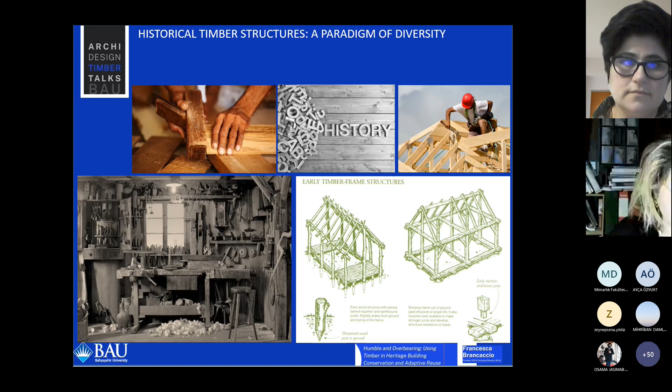Of course, it is a methodological approach that we have in restoration, which needs to understand what the problem is. As soon as we have some timber structure, the first thing to do is to study the literature on the subject, to study all the documents and evidence that we can have, and immediately also to start to understand the elements that we have. Then to make a survey, to try to register and record all the data that we have in a complete database, make the analysis of all these technologies, and also the analysis of the environment that we have.

Of course, it's very important to have information such as temperature or humidity or things like this. And then we have to understand what to do, which are the hypotheses that we can understand of the transformation of the typologies, of the solution of the dimensions, how to integrate it, and also to collect some similar case studies and then make some comparison and implementation.

What is also important, of course, is to understand and have all the information on timber, which timber is used, the kind of typology of degradation we have, which are the attacks, biological or non-biological, and also start to make a thorough survey of every element.

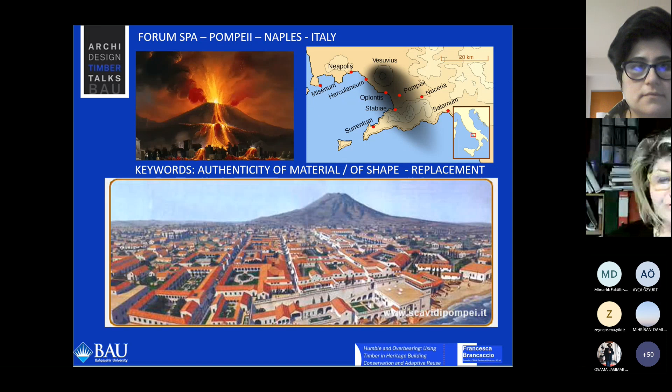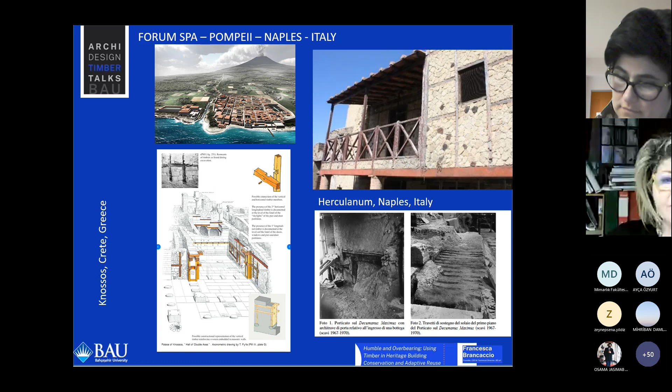This means that in restoration activities, as they started to bring to light the archaeological ruins of the two cities, since we find wood in Herculaneum, we can in some way restore it. Of course we cannot find the original wood, but the burnt wood, with some chemical addition of materials like paraffin or resins, can conserve the shape and also the material, which was the ancient wood. This means we can understand how the ancient structures were made, and even recuperate and consolidate the material to have as much of the old material as we can.

Here are some examples of wood which was used in structures, for doors, for boats, even for furniture, across different centuries. The techniques were studied at the end of the 19th century, and still today, when they find some elements, they are able to conserve the shape and even what is still kept of the material.

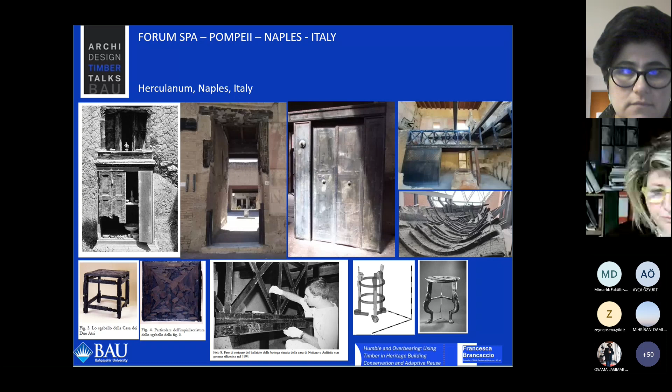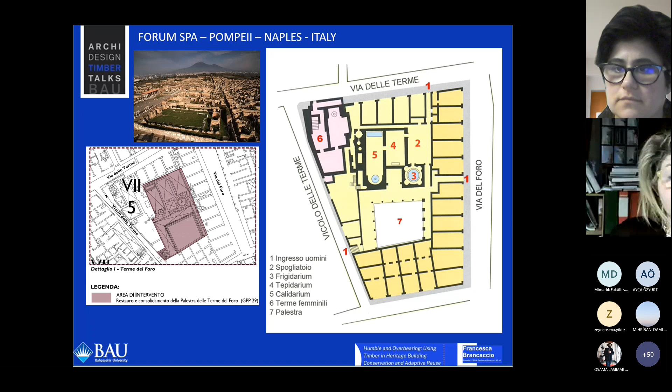Of course, in some cases, they need reintegration with modern wood or with resins. A different case is that of Pompeii. Pompeii was covered by a thicker layer of volcanic material, which also burned everything, so the timber was not conserved at all. We don't have any trace of timber, but we can understand where some timber structures were.

For example, in this case, the spa of Pompeii, in the center of the town, they could understand these were the ruins as soon as they were discovered. It is a portico which lost completely all the timber elements that were supposed to be here. Then there was a roof, but we don't have any trace of this roof. The idea of the restoration at the beginning of the 20th century was anyway to reconstruct the missing elements, and they decided to do it.

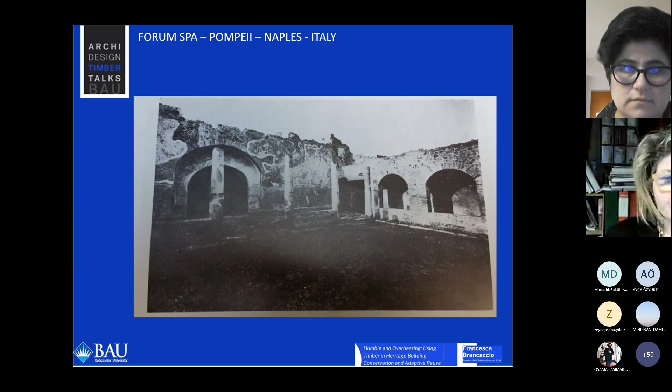This is the reconstruction with new material. The new material that was chosen was concrete. You may remember that in the Charter of Athens in 1931, the reconstruction of missing materials was welcomed, and they even suggested using new materials. Concrete was one of the materials suggested in order to be distinguished from the old material that was missing.

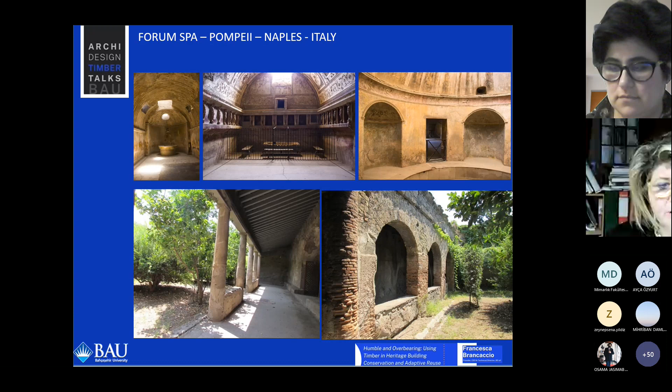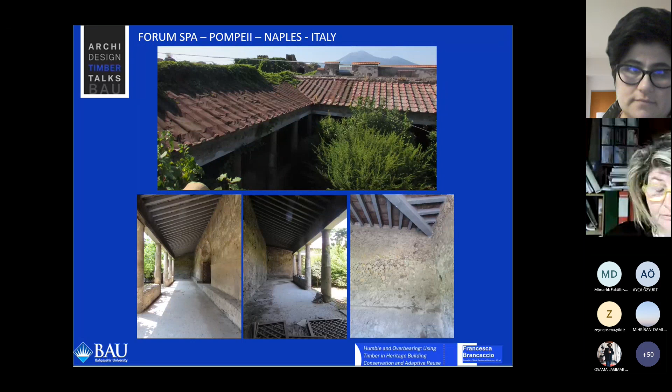In 1950, the archaeologists decided to reconstruct, to repropose the idea of this porch, a triporticus, with concrete beams. Of course, today these concrete beams start to give very big problems to the ancient walls, because of degradation, because of the iron that was inside that was oxidated and was also damaging the walls. Then the Archaeological Park of Pompeii wanted to get rid of this old structure and demolish everything and propose a new wood structure.

This is maybe a methodologically very extreme situation, because of course we know that once there was a wooden roof, and we know it because they discovered the old traces of the beams. But nobody has ever had the old image of this porch, even if we know about timber structures in Pompeii only from the frescoes that are in Pompeii. Then the idea here is to go back to history through an invention, a structure that of course existed, but that nowadays exists once again because we are changing the material from a modern material to a more traditional material.

The idea is to have a material which can give the idea of being more traditional, but also which has a better compatibility with the walls, which means that once the wood becomes older and has some decays, the consequences that these decays can have on the old walls will be less with less impact than the concrete, of course.

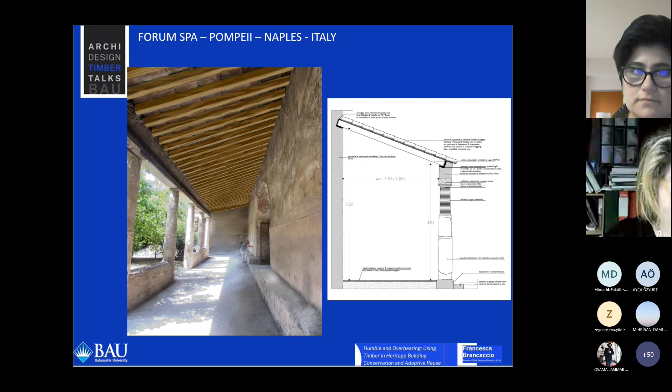In terms of identity, in terms of authenticity, this might be a kind of intervention that could, in some ways, make people who are not educated understand - people who cannot understand that old wood does not exist today in Pompeii. Then tourists could think that it is an old material, and this is maybe the philosophical and methodological question that we have to understand, because we know in restoration that it is very important to be able to distinguish the old from the new. In this case, that could be a problem, which means it is very important to explain that it is not an old material, but a new material used because of compatibility and also for a question of the traditional imaging of the space.

Another subject I would like to present, also in the south of Italy, or maybe in the middle of Italy - we are among Naples and Rome. Naples is in the south of Italy and Rome is the capital, in the middle of the country. It is a little town called Ceprano, not far from Frosinone. It was a Roman city which was destroyed during the Roman period and rebuilt in medieval age with the stones and remains of the old Roman city. Which means that today we have a medieval city with very narrow houses.

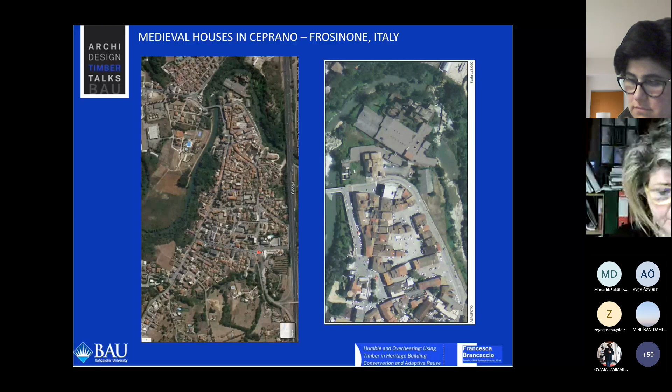Very poor houses also, because it was not a very rich town, but it had the traditional medieval Italian house, which was a house that had a shop giving onto the street, and then all the other rooms, one above the other, on the different floors upstairs. This town was also destroyed during the Second World War because it was bombed. Then you can see that there are many spaces which are empty because the traditional urban pattern was destroyed, and there are many houses that no longer exist.

The object of the work in this place was to work on some of the medieval houses which belong to the municipality of Ceprano, and the municipality wants these houses to become houses for poor people, for people who cannot afford high rent, and that can rent it at very low prices. The first idea of the municipality - and this can also show how the philosophy of restoration and the idea of what is valuable to conserve in Italy is changing - because only in 2016 they wanted to destroy these old houses and build new houses in concrete, and the project was already made, and the enterprise was chosen in order to start this work site. And I was appointed as director of work, as supervisor of work, and then I was also called to destroy these old medieval houses.

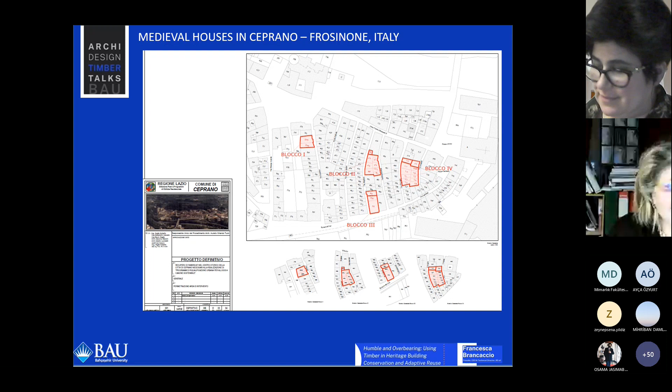Of course, many of them were abandoned for years and also destroyed by bombs. It was not easy to convince the municipality to do another kind of work, but the Ministry of Culture obliged them to do it, and this is what is happening now. We are still working on this. It's a work that is not yet finished.

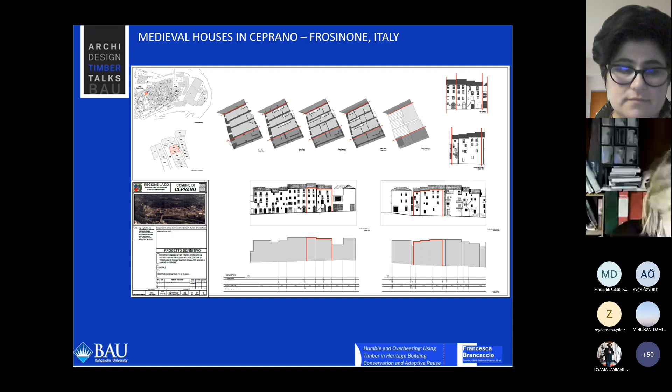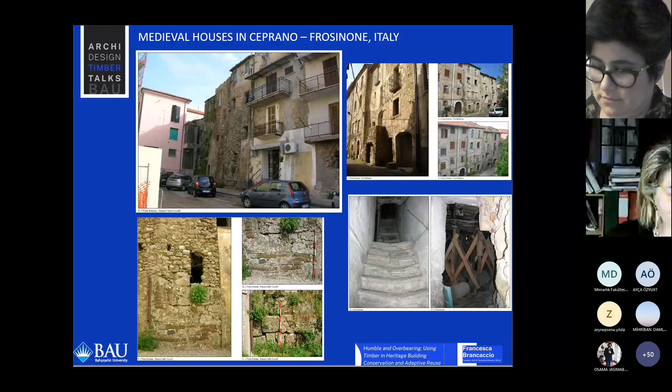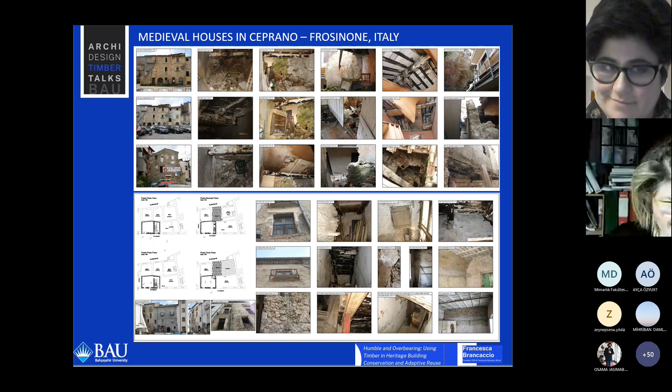We were obliged to study every house from the beginning, with all the research and survey, stone by stone, element by element, timber by timber, trying to understand all the elements we could save and all the others we were obliged to destroy, because they were no longer ensuring security, or we were not able to restore them, or because they were not valuable elements but just rubbish inside the buildings. Some views of the houses show how traditional they are.

The walls are made of these Roman stones, and then we have all the floors which are in timber, and also the roofs which are in timber covered with tiles.

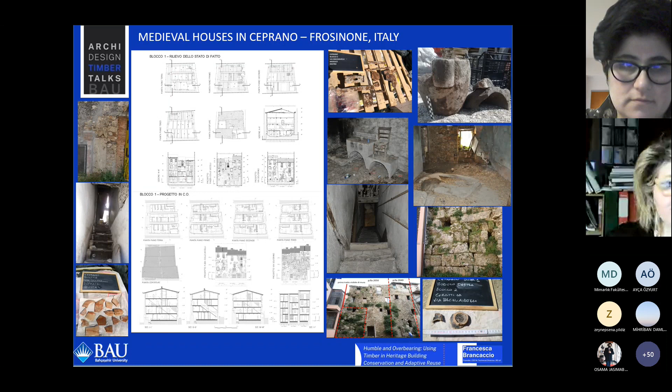All the elements have been studied and investigated with even an archaeological approach. Even if all the elements are very poor, every iron we found, every little element of popular, traditional culture was saved and studied. After all the survey, the intervention changed case by case, even if some elements are almost the same.

I mean, the technology is always the same. What is changing is that in some cases we could save some elements, and in others we could not.

In some cases we could, for example, we had investigation of walls, and the walls were better made than in other cases. Then we could, for example, rely on walls supporting the structures.

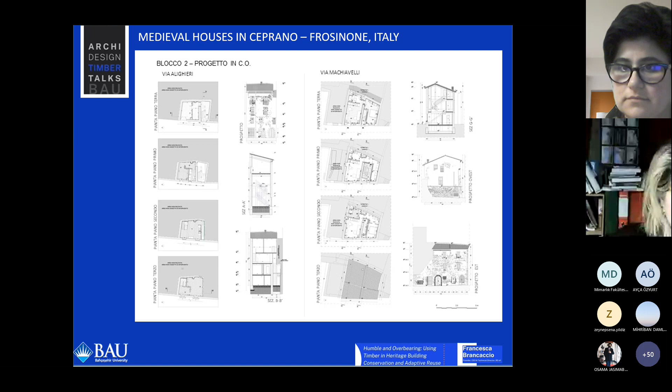In other cases, we were obliged to make an internal structure which avoided putting weight and effort on the walls, because the walls were not able to support the new weights that we need.

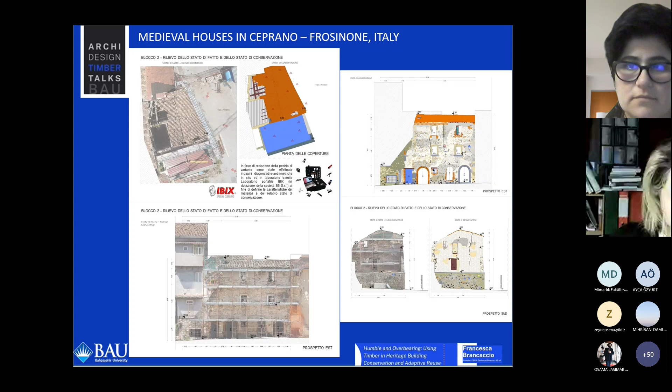Once again, some studies that were made. You see every element, every stone, every degradation was also investigated.

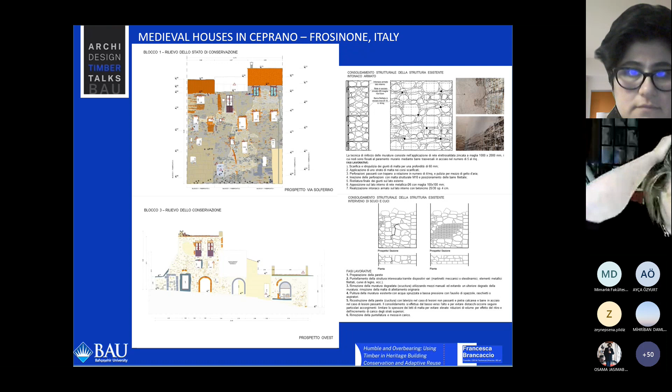Then we started to think about how to consolidate the walls, because of course we wanted to see them, since they are made of Roman stones, and it's interesting to see these walls. So we needed to find a way of consolidating without having plasters outside.

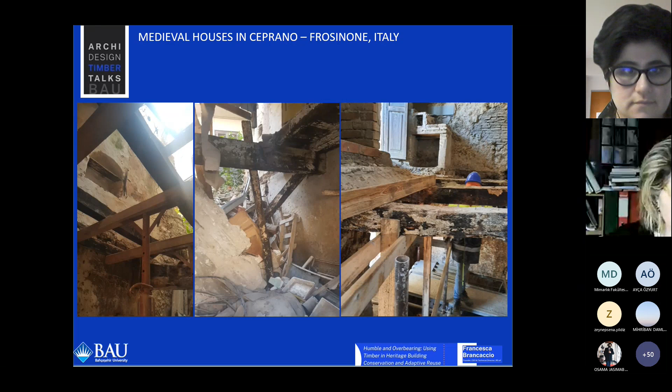This is one of the houses during our work of survey. You can see the degradation was complete because of the bombs, because of the roofs that had collapsed, and then the rain entered and destroyed everything, because of years and years of lack of maintenance and abandonment of everything.

Then we started to consolidate the walls and to think about, in some cases, an internal structure that could avoid any interference with the walls, doing it with iron and with this X-LAM wood, which was a very clever method to give the old idea of the floors that we used to have with traditional material, which is wood, but with modern technologies.

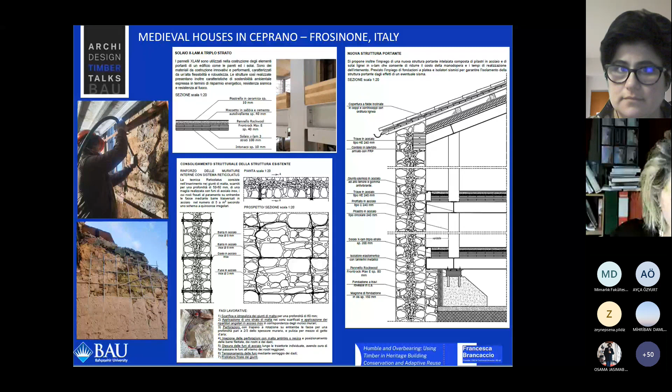Here are some examples. In other cases, we were able to keep even the old material, the old beams, but of course the old beams did not give any assurance of being able to keep the weight that we need. Then we needed to reinforce them by adding some modern elements. In this case, we put iron elements.

And we had then, a sort of compromising solution. I wanted to keep as much old material as I could, but I also needed to have floors ensuring the use that is forecasted, which is residential use. This is why we need to add some reinforcements.

In this case, we can distinguish it. We had the old wall, the old timber, and the iron elements supporting the timber. We are keeping all the old elements that we can, and changing all the elements that we cannot reuse. You can see even here the beams, old beams together with modern beams.

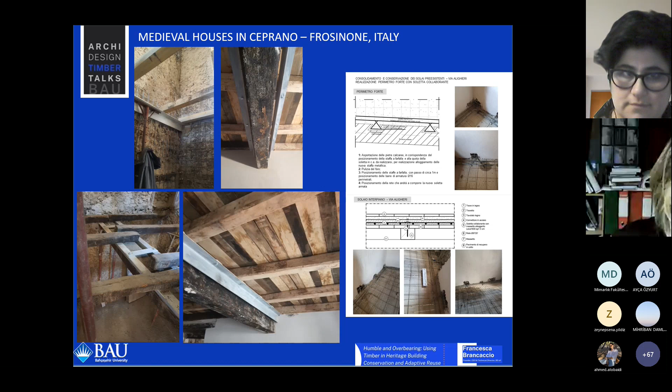All the system was also reinforced by some concrete elements all around the box of the walls. Then there were what we call 'code di rondine,' which are like little iron elements entering the walls, and with some concrete injection, they create a way of belting the building at the level of the floors.

For the roof, the same thing. We were able to keep all the beams of the roof, and also to improve the thermal resistance of the building by adding elements that satisfy the energy regulations we have in Italy. And we were able to reuse the old tiles together with modern tiles.

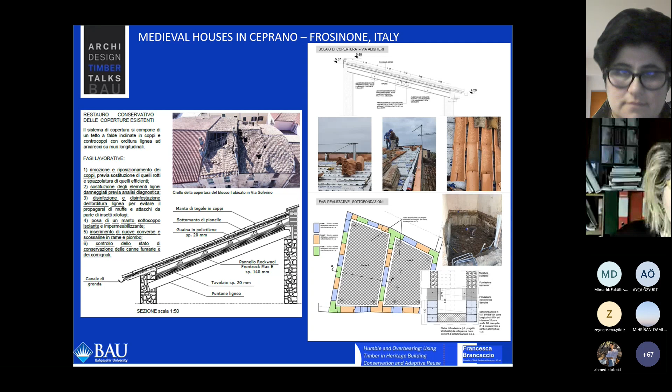We recuperated the old tiles and put them on top, adding new ones where we didn't have enough old tiles to cover everything. So we have an old image collaborating with new material together. Here is the roof — you see the wooden elements we recuperated from the old structure, together with new ones.

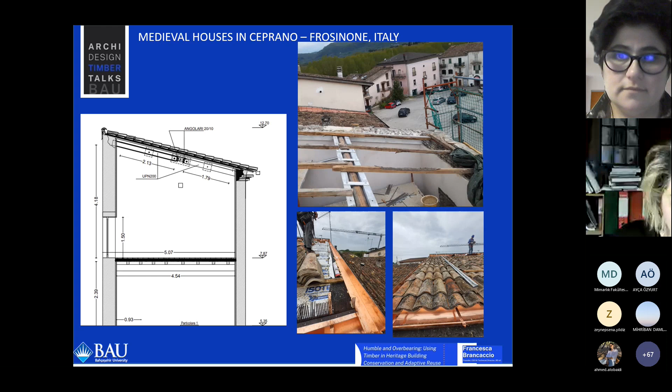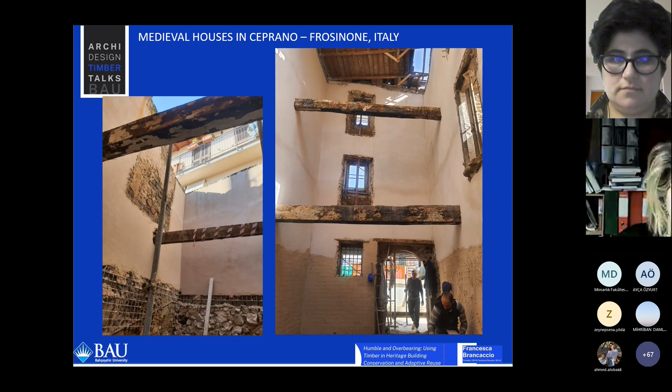Once again, during the work at the interior, we did not have any floor at all, but we kept all the elements that we could, and integrated them into the new structure.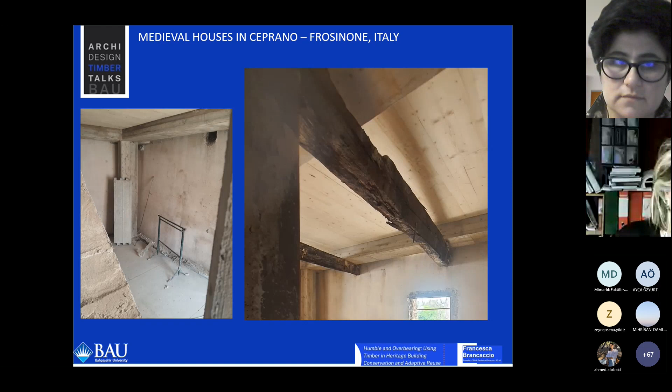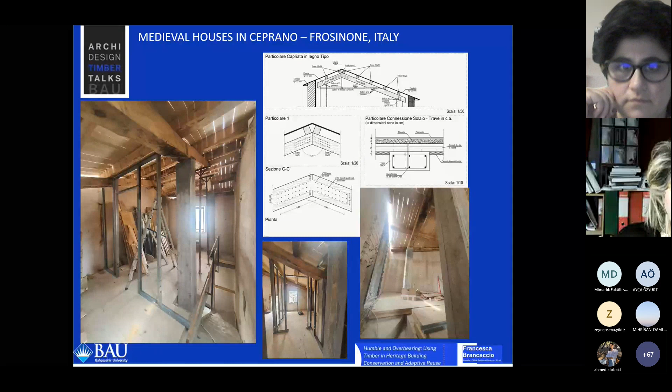This is another case. Here, we were obliged to make a new concrete structure inside the old box, always with X-lam between the concrete beams, while at the same time keeping the old beams. They don't have any structural function in this case, but they give a traditional image and are kept in the same place where they were. You see the concrete elements going up, and they are also supporting the roof, because even the roof is not linked to the ancient wall, but only to the concrete structure.

The third case is in another little house. Here we could use the walls to keep the floors, but we decided not to put wooden beams, instead using iron beams, always with X-lam among the beams, while always keeping the old timber beams.

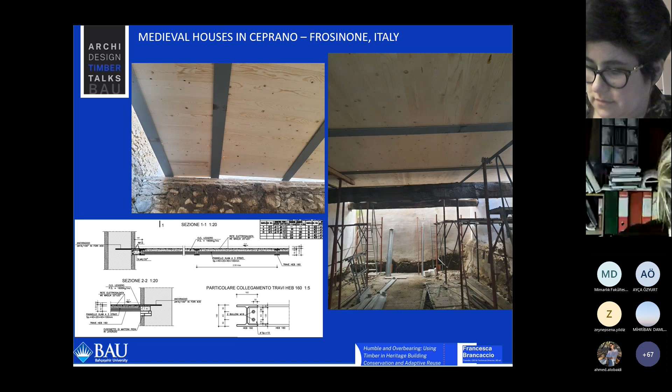The effect you can reach is very interesting, because you have traditional walls, and when you change things — since here we did not have any ancient floor anymore, they had all collapsed — you get a modern image together with traditional and modern materials linked together.

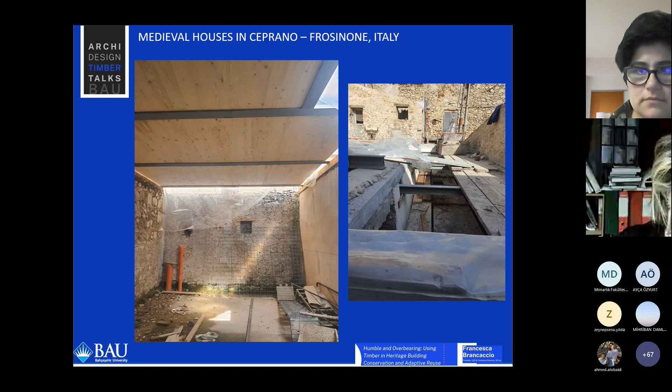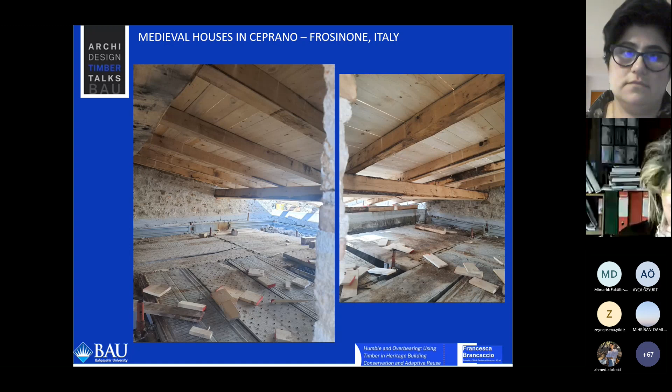For the roof, we decided to keep the traditional technology, but we changed all the beams, because we had only one or two still in place, and they were attacked by fungal decay and insects, so it was not possible to save them anymore. We measured them and made new beams with exactly the same shape, made of the same wood, using the same technology.

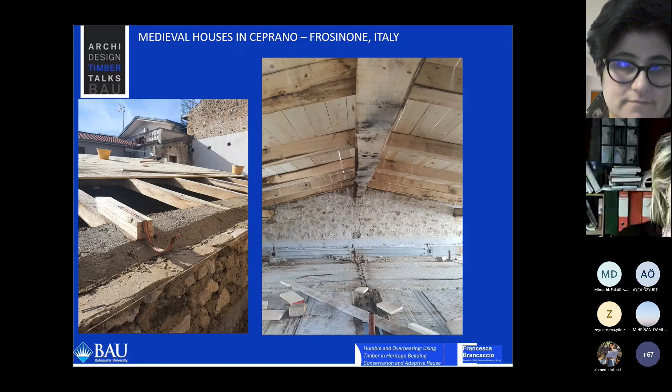Another case — we are passing from very poor houses to a very rich house, which was a palace for an aristocratic family of the 18th century in the center of Naples. The historical center of the city of Naples is a UNESCO World Heritage site with a protection zone.

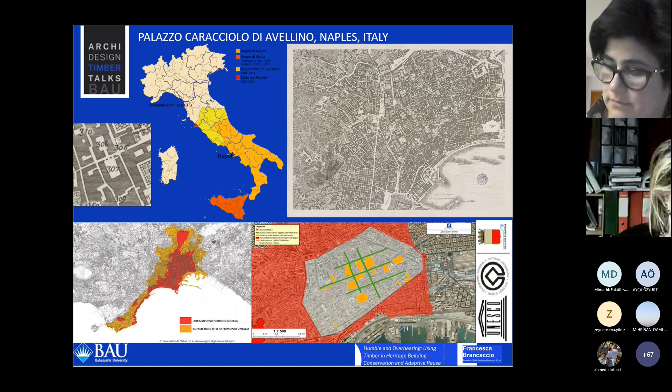In this zone, which was first the old Greek and then Roman city, an important Neapolitan family, the Caracciolo di Avellino family, built a very big building, which was supposed to be a sort of academy, a place where philosophers, artists, and important intellectuals of the city would stay, discuss, and hold conferences and lectures.

Over the centuries, when the family sold the palace, it was divided into different properties, and they even lost the memory of beautiful frescoes described in literature. It was used as a school and completely covered with white paint, so all the layers of the frescoes were completely covered. We cannot see anything anymore.

One of the most important questions while restoring this heritage building was the earthquake, because Naples is a seismic zone. We had a very important earthquake in 1980 which destroyed and damaged lots of buildings in the city. The history of our region is an history of earthquakes.

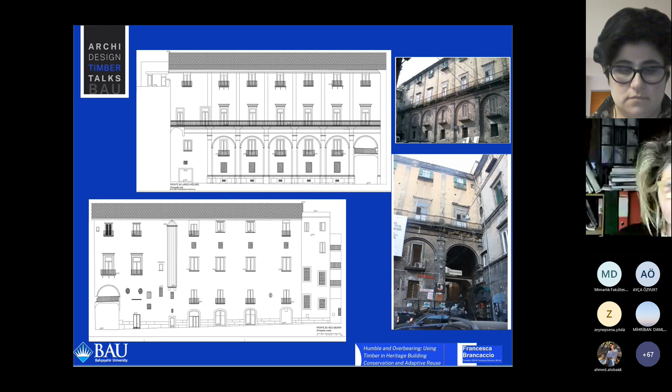Once again, the investigations, the knowledge of the building is the most important thing to do, because when you study and understand the geometry, the materials, the decays and why you find them, you can fight and repair them, but also prevent future decays. You can also understand what to do and how to intervene, which methodology you can apply in this case.

What we decided to do here, as our philosophy teaches us, is to do as little as possible. This is what we strongly believe: for us restoration is to recognize the values, to try to conserve every element you can identify as a value of the building, and to intervene as little as you can. We call it the minimum intervention. Once you can do less, you are really succeeding in your work.

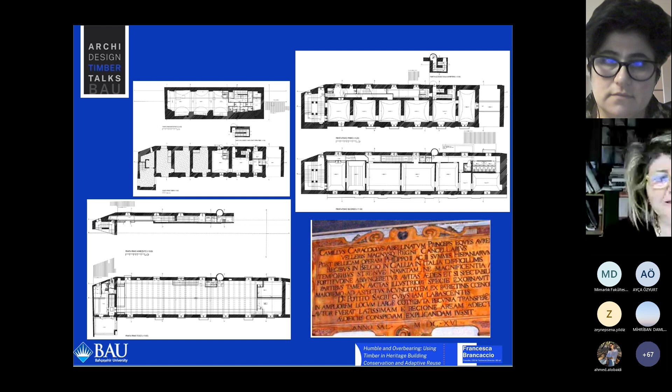In this case, the survey showed that we had a building built in two different phases. The lower part was made in stones, Neapolitan tufo stone, which is a volcanic stone, and the structure was wall with vaults - you can see in the section the part in black, which is the profile of the vaults. The two upper floors had a floor and roof which were in timber.

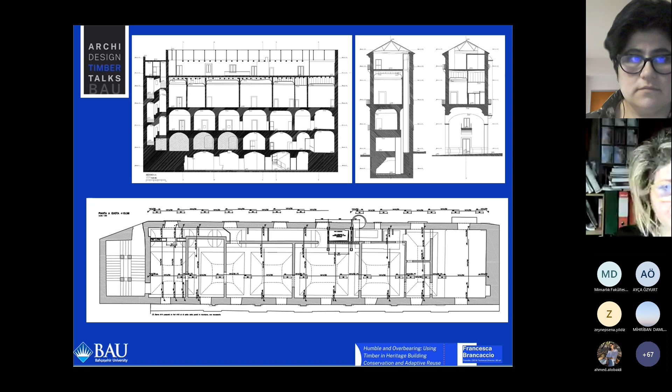Then the first thing to do was to consolidate the building, to make some verification in order to improve the strength and resistance to earthquakes. These were some elements that we were able to discover during the restoration activities.

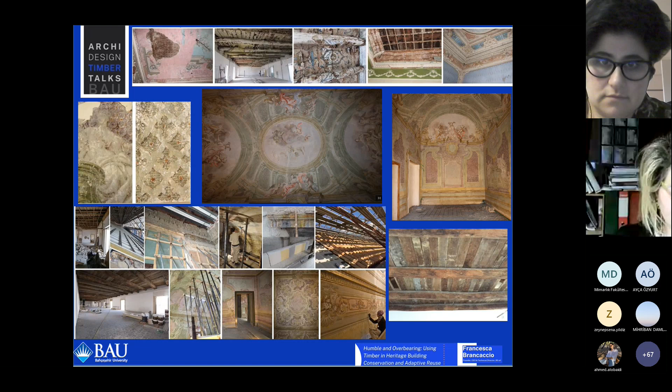For instance, all the frescoes in all the rooms at the first and second floor that we were obliged to conserve. We could not intervene on walls with consolidation activities because we had very beautiful plasters with very beautiful frescoes, and the intervention had to understand this kind of problem and respect all the values of the building.

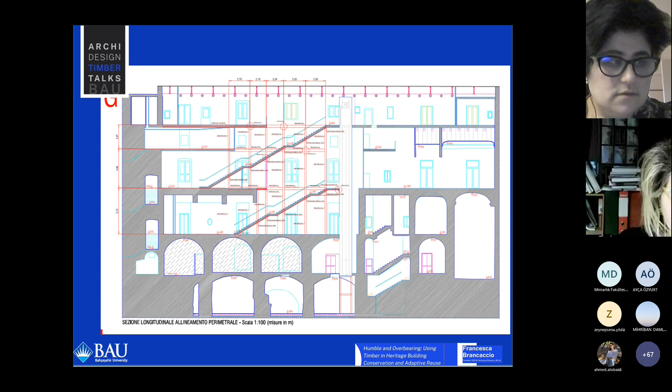What we wanted to keep was, of course, the two floors in wood, the upper floors, while also achieving better resistance to earthquake. So what we decided to do was put some chains, iron chains, which could improve the resistance of the building.

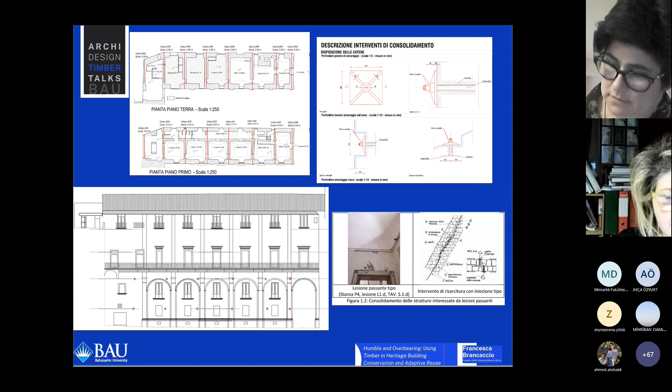There were very little elements inserted at the lower floors in order to improve resistance. In some cases, when we had important degradation of the wall, some important lesions, we were able to make consolidation interventions. The same thing also for the vaults - where necessary, we made some intervention on the vaults. What about the timber?

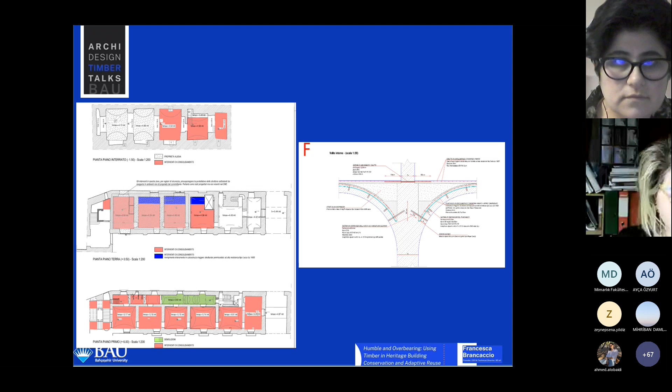The problem was that in some cases we had very important frescoes, and of course we could not take them away. In other cases we were able to analyze all the timber beams and understand that we could keep them. Then the only work done was to reinforce the ends of the beams where they are introduced into the wall, and also to clean them as little as possible in order to prevent any insect or further degradation.

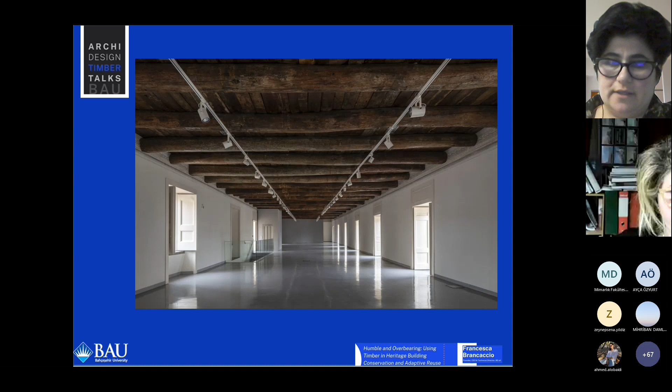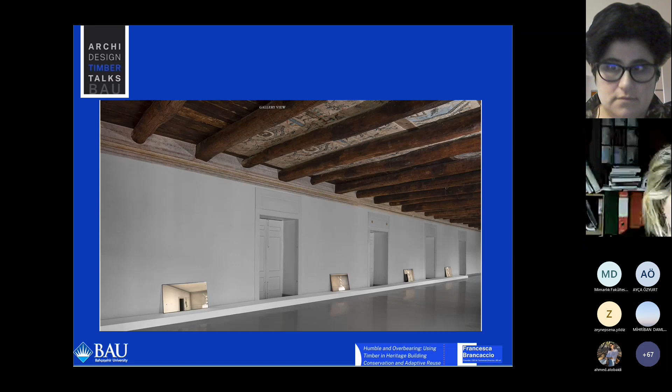We were also able to keep some little traces of painted paper which was traditionally put on the beams. And when we found them, we were able to restore them and find them once again.

Here you have the vaulted spaces at the ground floor and the first floor. We rediscovered all the frescoes which were completely hidden, and we were also able to restore all the windows and other wooden elements, the doors, that were original. Unfortunately we could not find the original color because they were all repainted - I would have liked to find the original layer of the painter, but it was not possible. But we found the original color, then we repainted it in the original color.

When the beams were not strong enough to support the charge that the new museum should have supported - because at the upper floor they wanted to make a sort of restaurant, cafeteria, and auditorium, which had to stand very big weights - we wanted to keep the old beams in order to make people understand the old technologies, and also because the beams were not damaged and we could keep them, but they were not enough to take the weight that the new building was asked to support.

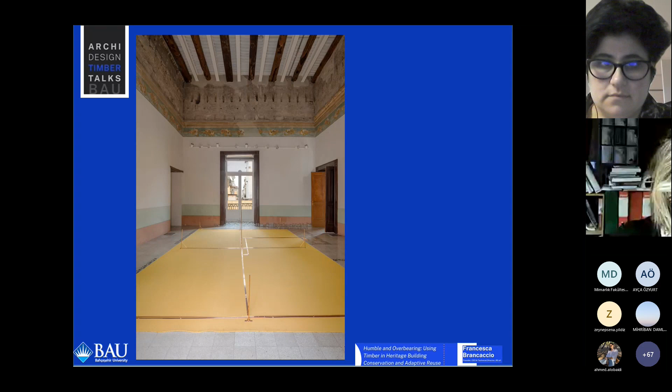Of course, what you are missing are the wooden elements among the beams, which is in the tradition of the Neapolitan floor. But we could not keep everything - there were elements that we were obliged to eliminate because they were not supporting anymore. They were all completely destroyed, and then we were really obliged to destroy them.

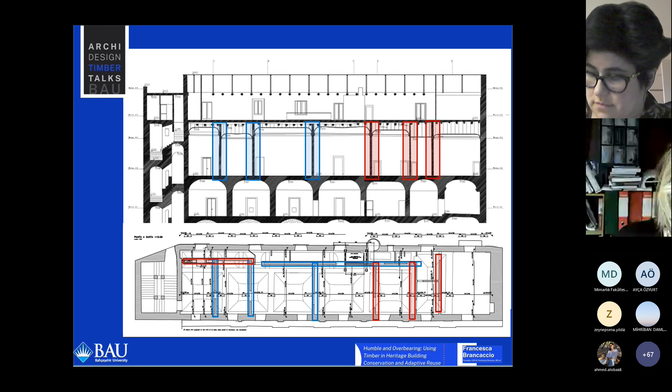What about earthquakes? Once again, we discovered in these elements, the red one and the blue one, that they were built after the 19th century, in the system of opus craticium, the system of Casa Baraccata. They were hiding wooden elements together with masonry.

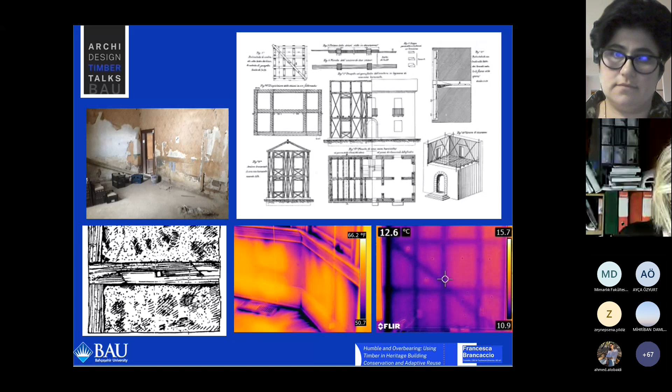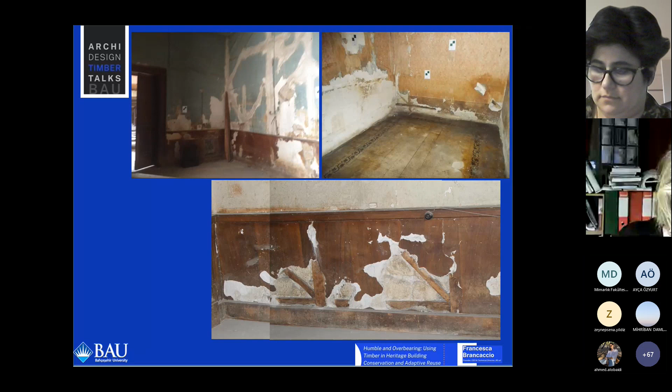And what to do in this case? Of course when we had frescoes, we could not do anything because we could not take the plaster away in order to reinforce the wooden elements. We were able to investigate them with thermography, and in the very limited places where we did not have frescoes, we could make some kind of reinforcement of these elements, once again by using iron elements that were hidden then in the new plaster.

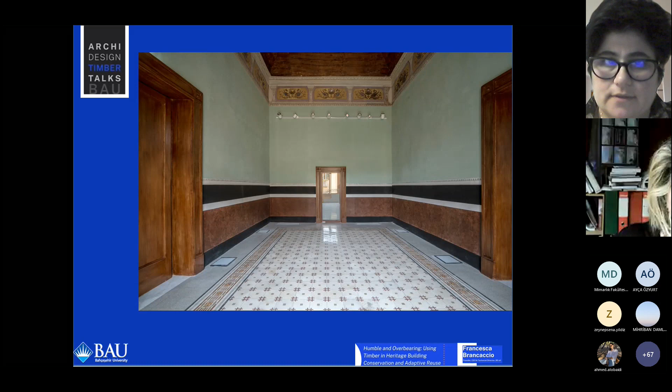And this is the effect that you have today, which are new plasters, new painting where necessary, and the respect of what was already existing. Here you can see there is a decoration from the beginning of the 19th century, and also an ancient wall, and all the doors - everything was kept, but the plaster where we were hiding the modern structure, and once again one of the effects of the restoration today.

Then I don't know how much time I still have. Maybe a few minutes. Just to give some general rules of the intervention.

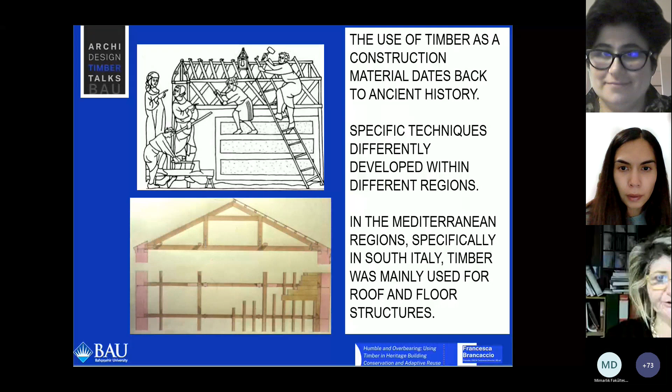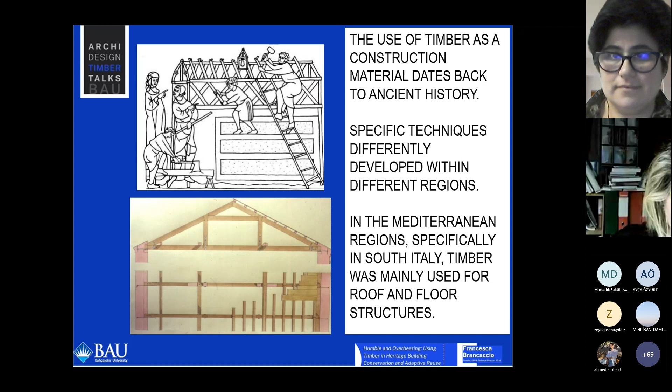The use of timber as a construction material dates back to ancient history, and we have different technologies. We have to understand case by case which is the technology, we have to study what the technologies are. We can consider historical timber structure as a paradigm of diversity. Diversity means that each element, each part of an element, is a mark of heritage authenticity. It means the structure can change, can be various, and can have different levels, and that there is variation in the typological form, which means we have a special task: we have to recognize, capture, and interpret all the differences.

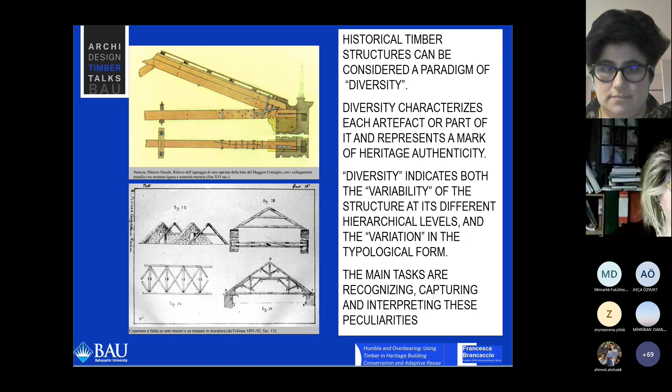We have to understand that, yes, timber can be a very strong material, but it also has a lot of sensibility to external conditions. When there is a lack of maintenance, a lack of keeping, it is very difficult to preserve it. What is important is the change of the way of thinking.

In Italy, nowadays we are having a new way of thinking, which is not to destroy timber. Only 20 or 30 years ago, the easiest thing to do was to destroy a timber structure and propose a steel structure, a concrete structure, or glulam in place of timber.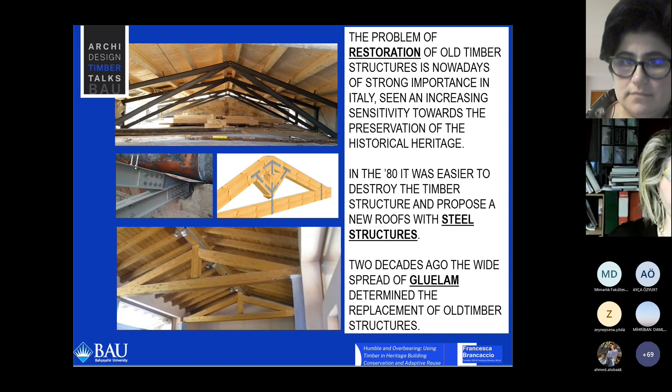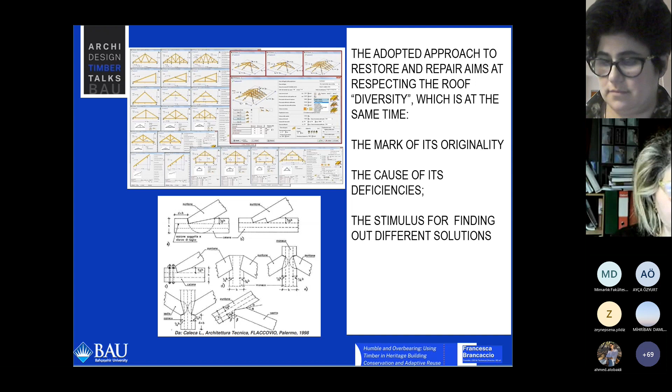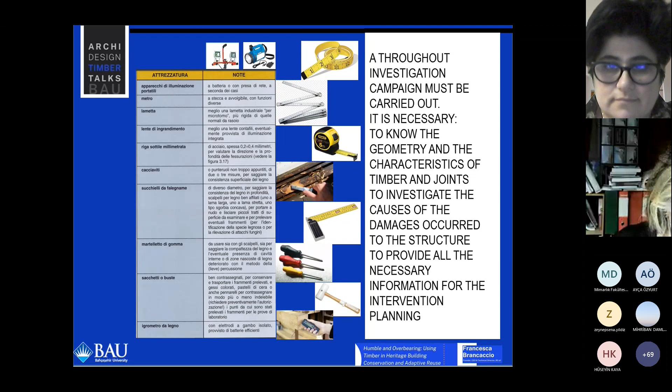Today the methodology is to keep as much as you can, to study it, to understand which can be the solution in order to intervene. You can do this through a very scientific investigation campaign, because you need to know the geometry, understand the joints, understand the causes of the damages, and make an intervention plan.

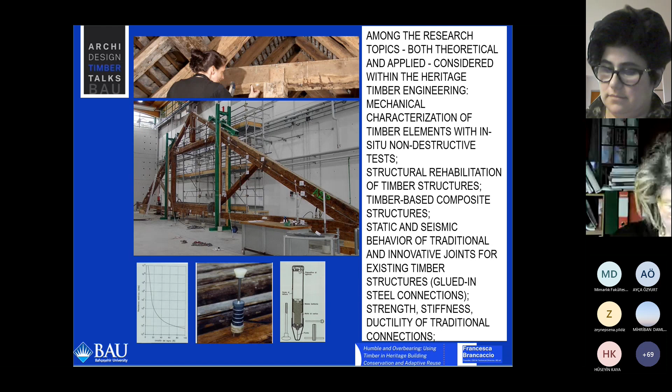You need to understand the structural behavior in the organism, in the building itself, and you have to apply a methodology which relies on reversibility, minimal intervention, the idea of saving as much as possible, and the idea of distinguishing the new from the old.

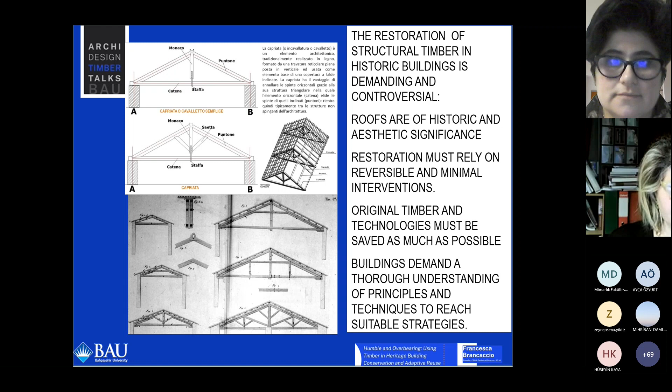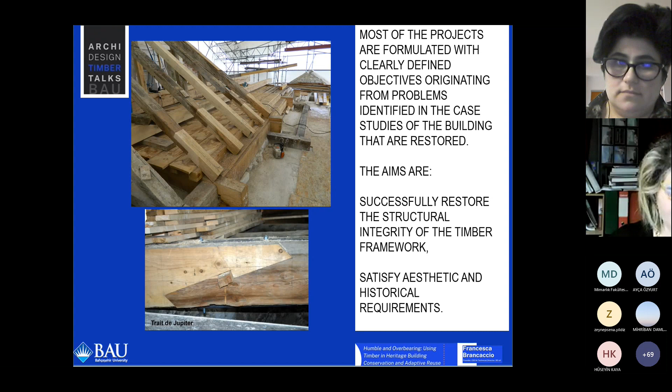Every case needs a suitable strategy. You cannot have a one-case solution, but every project needs to understand which are the problems and how to intervene, how to re-give, if you can, the integrity of the timber framework. How can you satisfy aesthetic and historical requirements together?

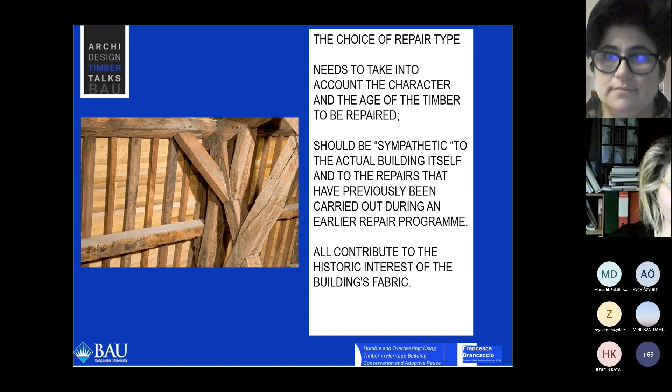You can repair, of course. You have to take into account the character and the age of the timber you are repairing. You have to choose new material which is sympathetic to the actual building itself, and which also sticks to the old material, contributing to the history and historical interest of the building's fabric.

You need to make a careful investigation, a specification, and you need workers who are able to work on wood. The execution is very important. It is a very specific profession, and you need professionals for this. There is no restoration or conservation project that can be successful unless you have good workers specialized in wood, who understand the wood and how to intervene, and the technologies specific to this kind of material.

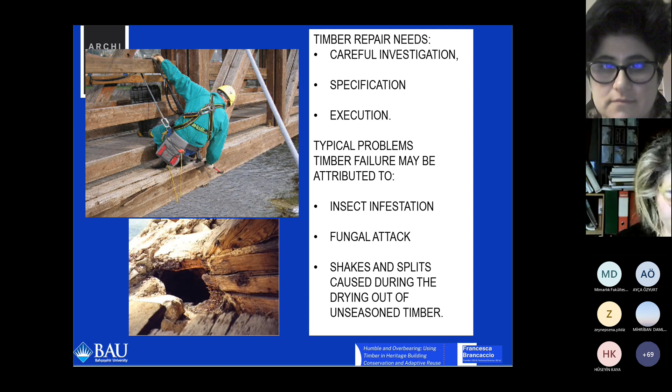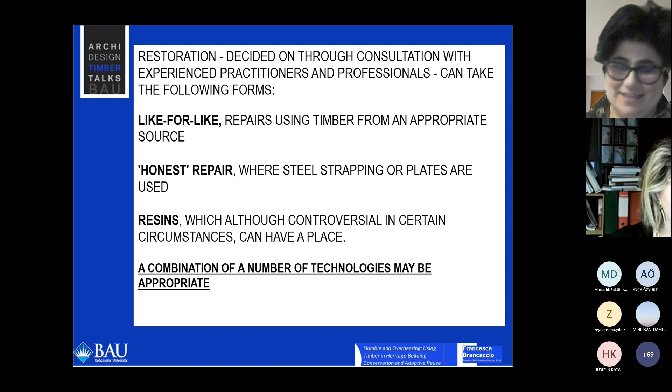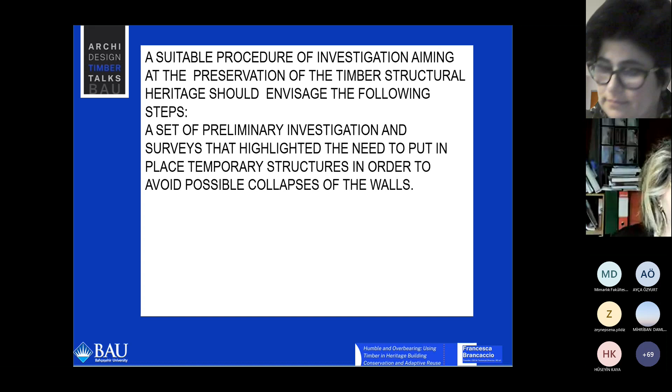You can make like-for-like repairs, but you must do an honest repair. An honest repair means you always choose the suitable procedure of investigation and preservation, which sometimes needs preliminary temporary structures in order to protect and reach the timber. In some cases you cannot reach it without scaffolding, and sometimes you need time to do this. It's not always something you can plan during design, but something you discover while doing the work.

The diagnosis you have to do is a very scientific diagnosis. You need professionals who are experts in this material, because you need to identify the wooden species, the moisture content, and understand the classes of biological attack risk. You have to study the geometry and morphology of every element, and the elements of decay and damage. This is not something a general technician can do, but requires someone who is really specialized in this kind of understanding.

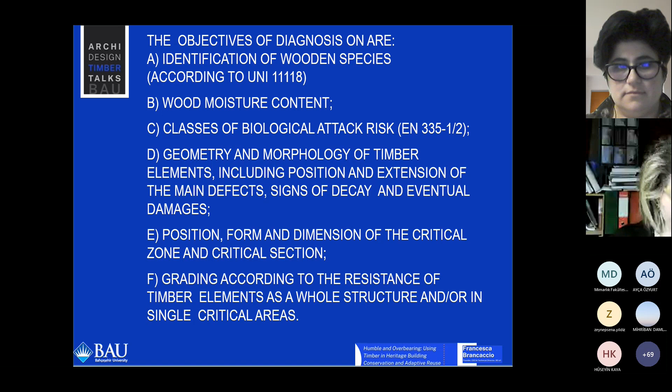You also try to understand which are the critical areas, and the grading according to the resistance of timber elements in the whole structure.

The only rules are that you have to try as much as you can to respect the identity of the building, to understand the impact of the architectural intervention, and to restore as far as possible the original core values. This means that in each case, you have to make a critical selection of possible technical solutions, try to keep the historical and aesthetic characteristics, and once again respect the criteria of reversibility, compatibility, minimum intervention, and I dare say, being able to distinguish it.

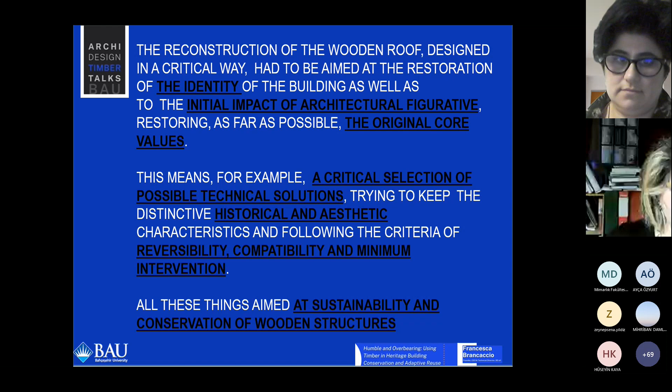All these things are aimed at sustainability and conservation of wooden structures, and also their integration when needed.

I think all these elements help us find out the traditional values, to find out what you are obliged to lose and what you have to keep, to be able to restore when necessary, and also to help wood when it cannot work by itself but needs a little help. These are the aims that lead to the transmission of tangible and intangible values to future generations, which is the principal scope of restoring, conserving, and protecting, in order to transmit these values, and also to have keeping rules that help maintain the heritage for the future. Thank you very much.

Thank you very much, Francesca, for the detailed presentation about conservation and restoration of traditional timber structures. I think the presentation explains, in a simple way, how we transfer tangible and intangible heritage to future generations. We need to keep authenticity, and we need to find the best ways for sustainability. We have good examples with your works here, and knowledge about how we keep our timber heritage, how we can use rules, wood species, and new materials. I think we see all the keywords for restoration and timber heritage conservation here.